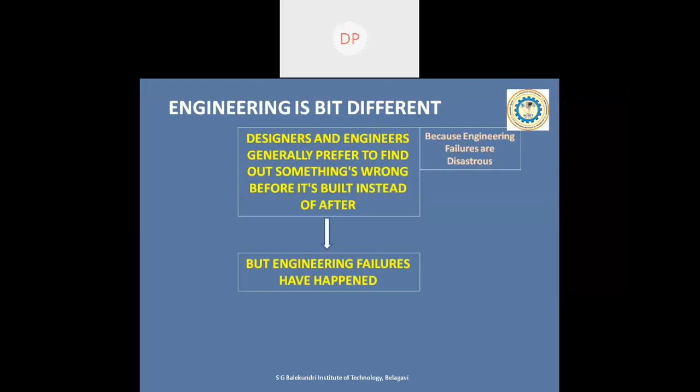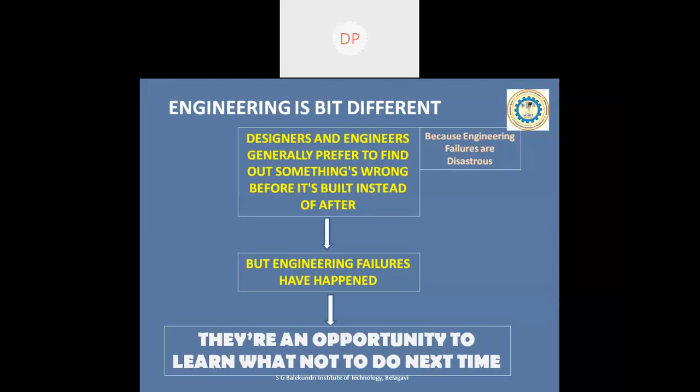But engineering failures have happened. We can't say that none of the engineering structures have ever failed, but engineering structure failures have happened. So we can call them an opportunity to learn what not to do next time. That's the very simple thing we can do. Let me take this opportunity in this session, and we'll see some of the failures of structures, and we'll see what we can learn from those things, and what we should not do next time when we go to design or build such types of structures.

Okay, so let's take this opportunity and learn from structural failures and try not to repeat the same mistakes. Rather, I would say somebody has told that every new mistake is an opportunity to learn, but repeating the same mistake, we should term it as a blunder. So everyone has a chance to make a new mistake, but the same mistake should not be repeated. That's what we have to keep in mind.

Now when I move to the next slide, which structural failures will we be looking at today? We'll be looking at the Hyatt Regency walkway failure, Tacoma Narrows bridge failure, Can Tho bridge failure, Citicorp Tower - it's actually not a failure, but an important lesson is to be learned from that. The next one is also the same thing - it didn't fail, but there's something important we can learn from that, which is the Millennium Bridge. And the last one is a very funny one, the Walkie Talkie Tower. So I have ended my session with that little funny type of failure.

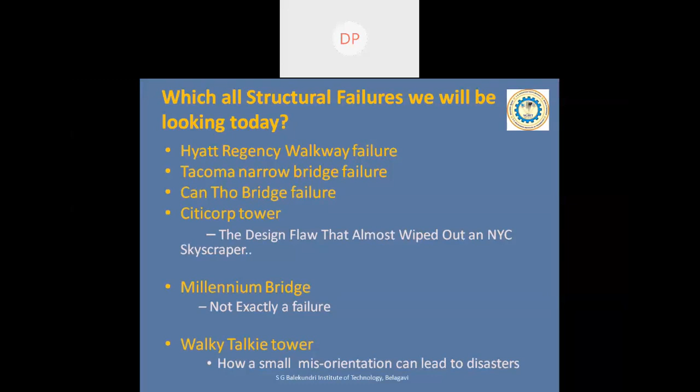So we'll see all those things one by one now. Let's start our journey. The first one, let me take the Hyatt Regency walkway failure. First, I will give the introduction about the structure, and we'll see what has actually happened there.

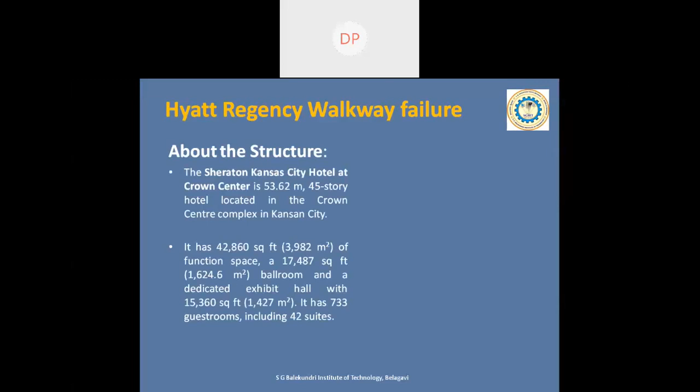So what exactly happened here? On July 17, 1981, two walkways collapsed without warning at the Hyatt Regency Hotel, one directly above the other. They crashed onto a tea dance floor being held in the hotel's lobby, killing almost around 114 people and severely injuring almost around 216 people.

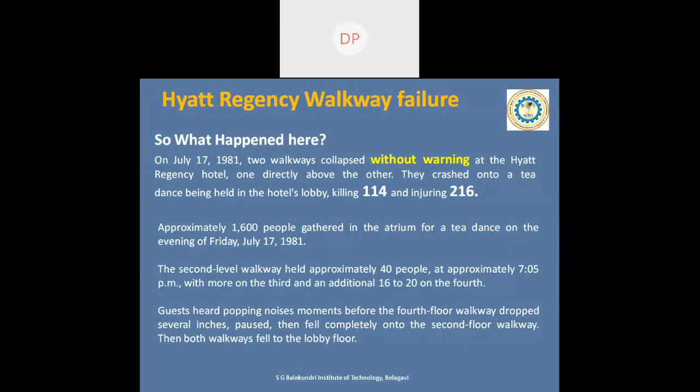Approximately 1,600 people gathered in the atrium for a tea dance on the evening of Friday, July 17, 1981. The second level walkway held approximately 40 people, with more on the third, and an additional 16 to 20 on the fourth floor walkway. Guests heard popping noises moments before the fourth floor walkway dropped several inches, paused, then fell completely onto the second floor walkway. Then both walkways fell to the lobby floor.

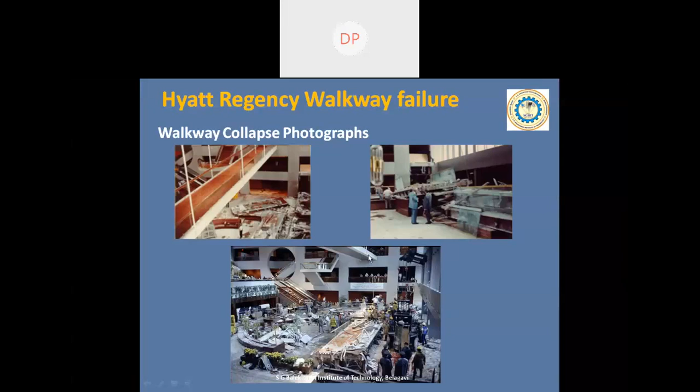These are some of the photographs showing the collapse of the walkways. You can see here the fourth floor walkway which collapsed, and the situation of the second floor walkway. This picture will give you the whole idea of what happened there. This is actually the third floor walkway, which nothing happened to.

So what was actually the cause of the collapse? Instead of being supported by pillars, each walkway was suspended from long rods hanging down from the ceiling. That's why the walkways were called skywalks, because nothing was supporting them from beneath. They were totally hanging from the ceiling.

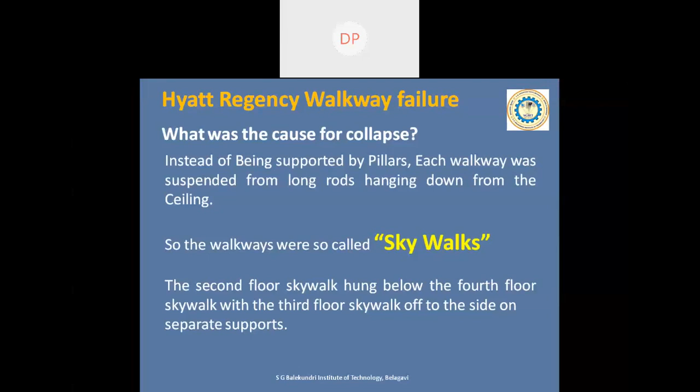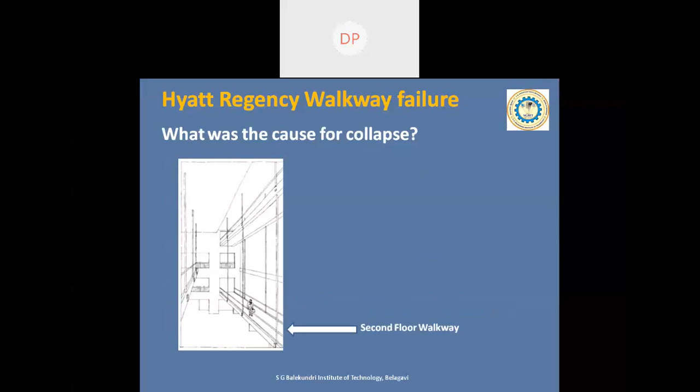The second floor skywalk hung below the fourth floor skywalk, with the third floor skywalk off to the side on separate supports. I'll show you the diagrams. So this is the second floor walkway, which was supported below the fourth floor walkway.

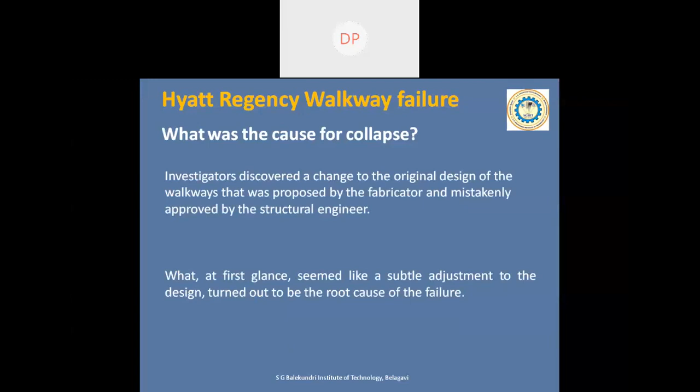And why did they actually collapse? Investigators discovered a change to the original design of the walkways that was proposed by the fabricator and mistakenly approved by the structural engineer. What at first glance seemed to be a subtle adjustment to the design turned out to be the root cause of the failure. Here you can see the box girder which was actually supporting the walkway, and these were the hanger rods which were supporting the box girders.

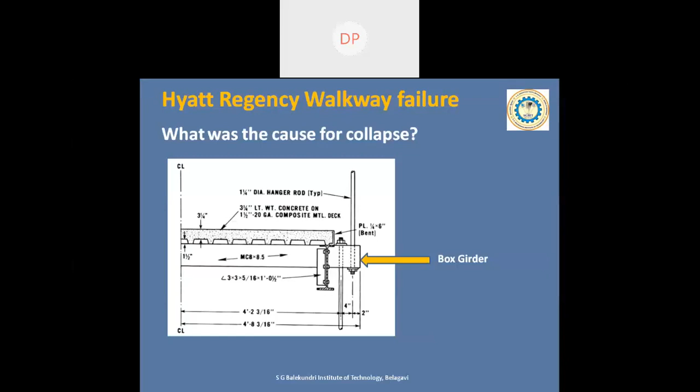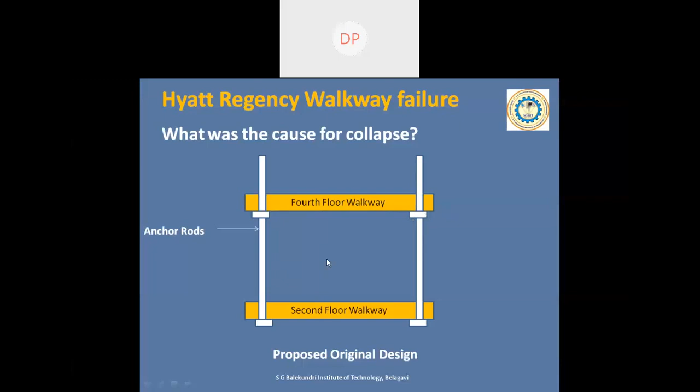Now this was actually the proposed original design, and you can see here this was the second floor walkway. I'm showing the cross section, and this was the fourth floor walkway. These were the anchor rods which were supporting both walkways. This was the original design, but it was not adopted at that point of time.

Why? The fabricator responsible for constructing the walkways objected to this plan because it would require screw threads for the entire length of the hanger rods, which could easily get damaged during construction. It was his assumption that if they provided screw threads for the whole length of the anchor rods, they may easily get damaged during construction. So this design was not feasible.

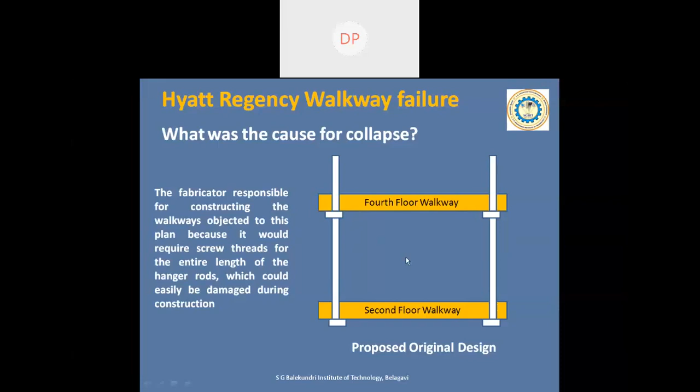So he came up with this kind of idea. This was the changed design which was actually adopted. They proposed to split the hanger rods into two sets. These hanger rods were supporting the fourth floor walkway, and these hanger rods were supporting the second floor walkway. One connected the fourth floor walkway to the roof, and one connected the second floor walkway up to the fourth floor girders.

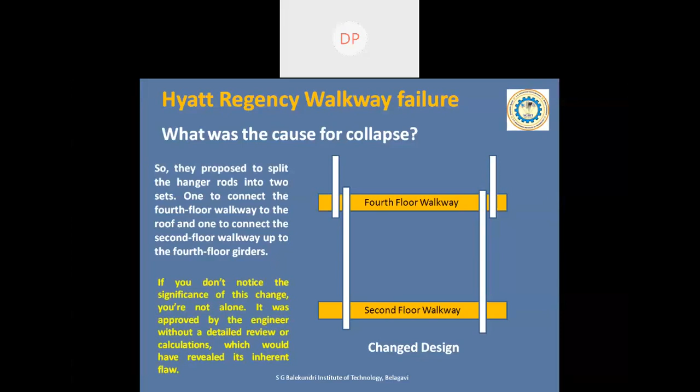Now, if you don't notice the significance of this change, don't worry, you're not alone. It was approved by the engineer without a detailed review or calculations, which would have revealed its inherent flaw, but it went unnoticed. So what was actually the mistake here? What was the mistake in the proposed design? Let me come back to the original design.

In this setup, which represents the original design, the load of the two walkways is independently transferred to the hanger rods. Now in the changed design, notice that the entire weight of the second floor walkway is being borne not directly by the hanger rod, but instead by the girder above. So the total load of the second floor walkway is now borne by the fourth floor walkway girder, and not directly by the anchor rod.

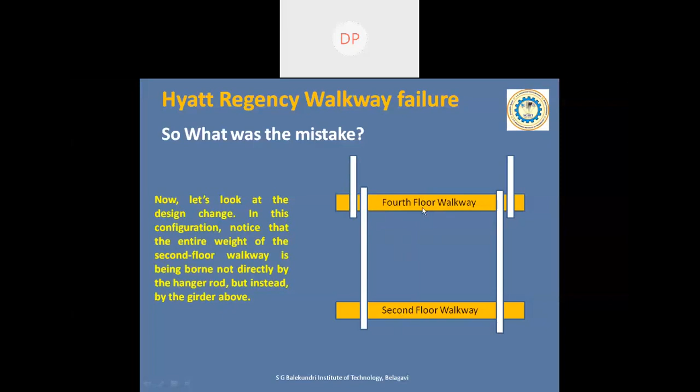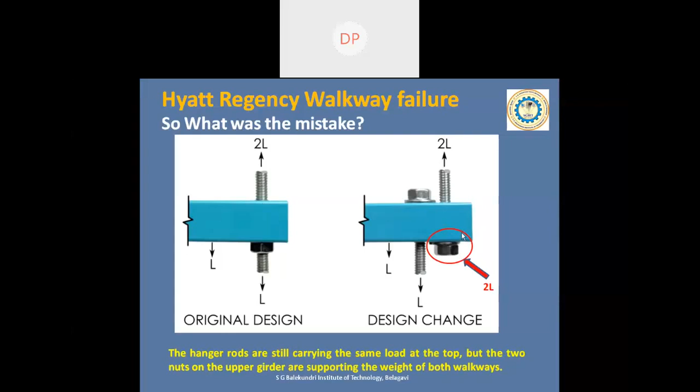Still, the anchor rods are carrying the same weight, but in this case, the load of the second floor walkway was totally borne by the fourth floor walkway. This picture will tell you the thing. This is the original design, where this fourth floor girder was carrying 2L load, and this was the load from the second floor walkway. Now in the changed design, this nut is actually not taking only L, instead it is taking 2L, meaning two times the load, which went unnoticed.

In simple words, if you are unable to understand this, imagine that you and your friend are both hanging on a rope.

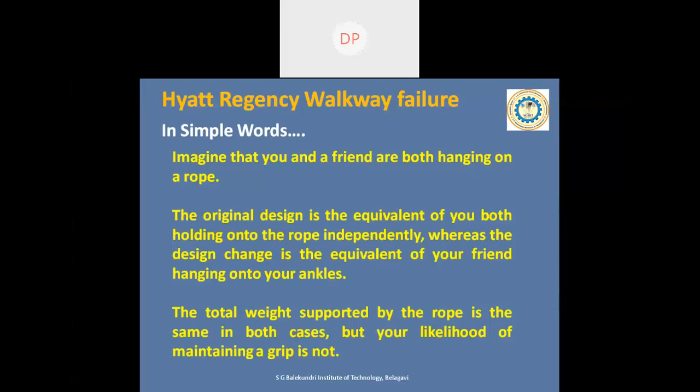The original design is the equivalent of you both holding onto the rope independently, whereas the design change is equivalent of your friend hanging onto your ankles instead of hanging onto the rope. The total weight supported by the rope is still the same in both cases, but your likelihood of maintaining grip with your friend's ankle is not. Hence, there is a high probability that you may slip from the ankles of your friend and fall down. The same thing happened in this case also.

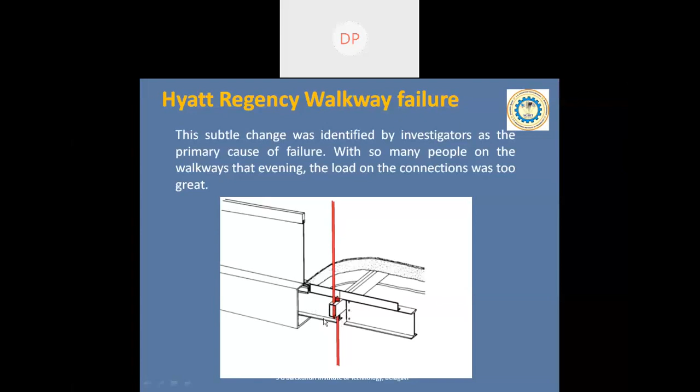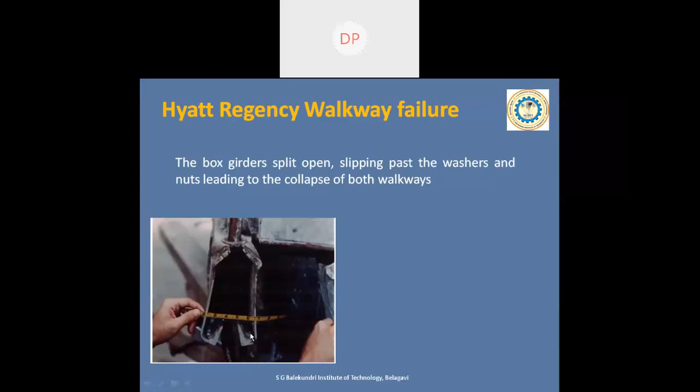This subtle change was identified by the investigators after the collapse. With so many people on the walkway that evening, the load on the connection was too great. You can see here, this was the anchor rod and these were the anchor rods - this was the connection which actually failed on that day. The box girder split open, slipping past the washers and nuts, leading to the collapse of both walkways. You can see in this diagram, the box girder has totally split open and both walkways collapsed.

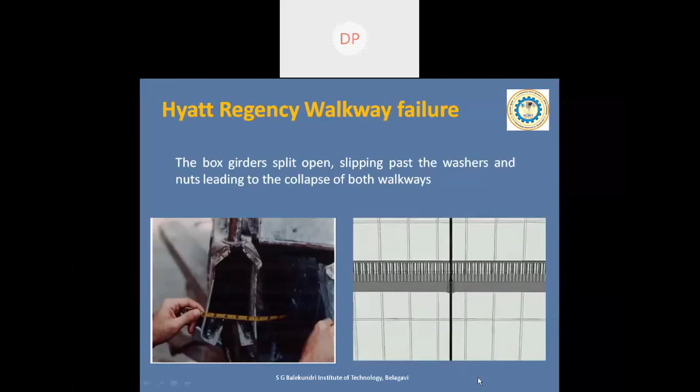This GIF file will actually slightly show you what happened exactly on that day. You can see here, because of that, the box girder is getting split open. So this caused the failure. So what lessons can we learn from this?

There is an implicit handshake between society and its engineers. We hardly have a choice but to trust that the constructed environment we live in is safe and sound. When an engineer seals a design, he or she takes responsibility for its accuracy and safety to the general public. But to err is human, and that includes engineers, because engineers are also human beings. So we try to develop conventions and processes that can catch and correct mistakes before they get too far, which actually didn't happen in this case. And that includes studying and learning from the errors made in the past.

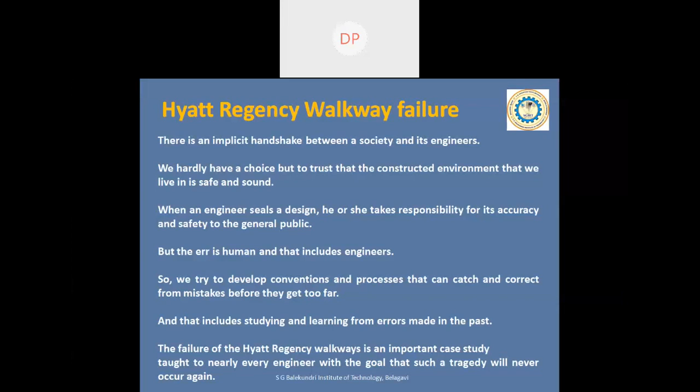That's why I chose this topic. The failure of the Hyatt Regency walkways is an important case study taught to nearly every engineer with the goal that such a tragedy will never occur again.

So we'll move on to the next type of failure. It is called the Tacoma Narrows Bridge failure. I think many of you might have learned about this type of failure, which is very much essential for any civil engineer, or I can say a structural engineer.

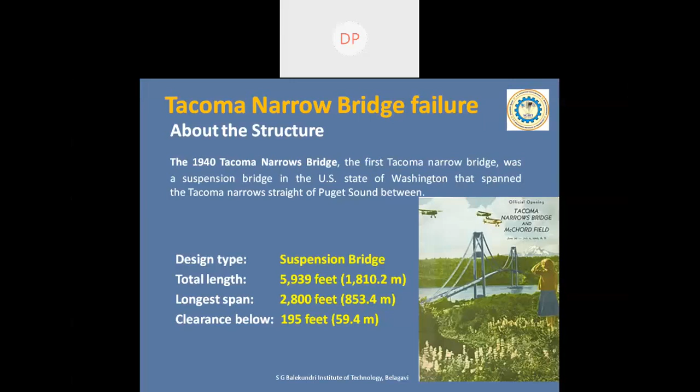So what happened here? Even before it opened in 1940, people noticed something strange about Washington State's Tacoma Narrows Bridge. It moved. Gentle winds could make the long suspension bridge flex up and down by meters at a time, making it very hard to drive or even walk across the bridge. Bridge designers tried to keep it from bouncing so much by installing shock absorbers, but they weren't effective at all. About 4 months after it opened to the public, one of its cables snapped.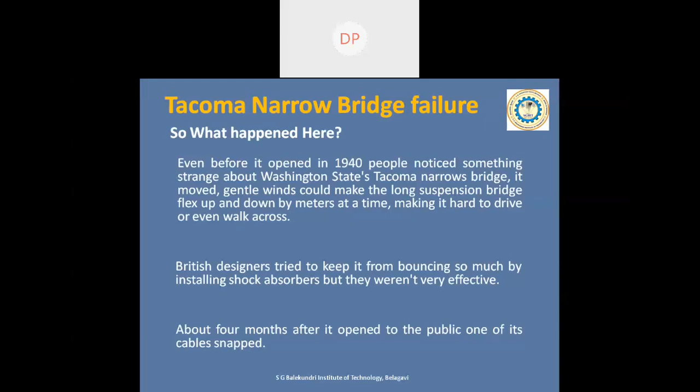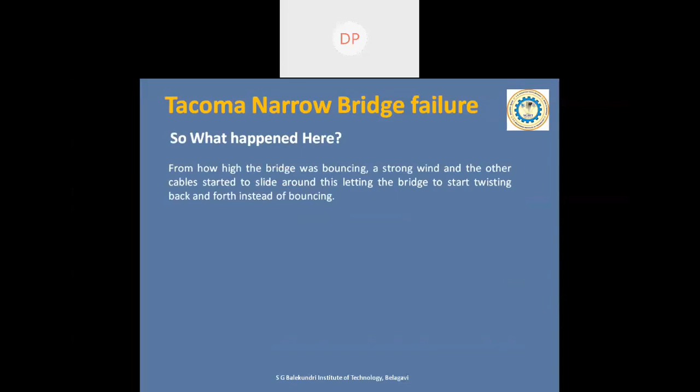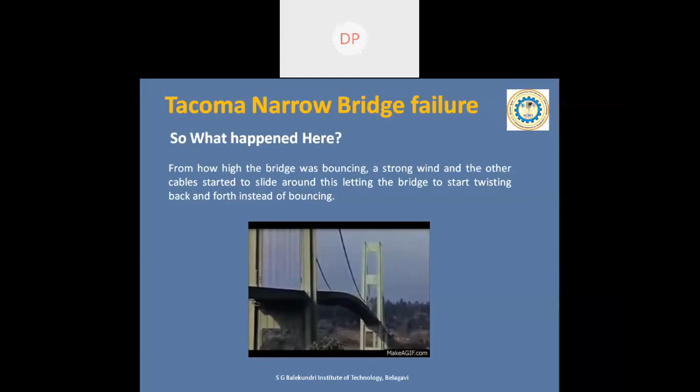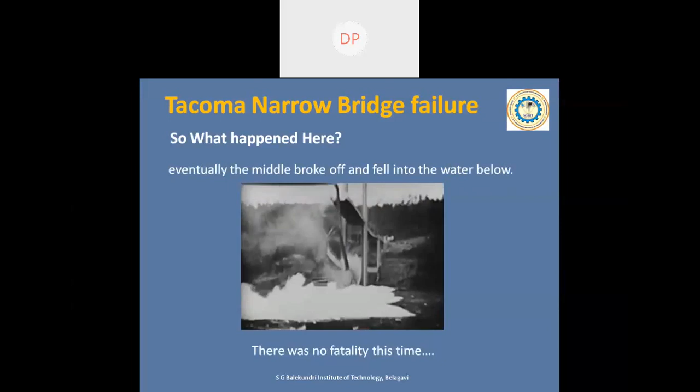From how high the bridge was bouncing, a strong wind and the other cables started to slide around, letting the bridge start twisting back and forth instead of bouncing. This GIF file will actually tell you how the bouncing and twisting effects of the narrow bridge were there. This was happening because of the wind. Eventually, the middle part of the bridge broke off and fell into the water below. Fortunately, there was no fatality at this time.

Actually, what was the cause of the failure? Tacoma Narrows failed because of something called aeroelastic flutter. The first cable snapped, and its side of the bridge fell slightly because it was less supported. Then the other cables on that side pulled up like stretched out rubber bands, and the bridge started twisting back and forth. Then the wind gave each twist a little boost. This small boost built up over the course of time and eventually twisted the bridge apart. We structural engineers call it resonance, where the natural frequency and the operating frequency both match, and the resonance effect comes into picture. The same thing happened in this Tacoma Narrows Bridge also.

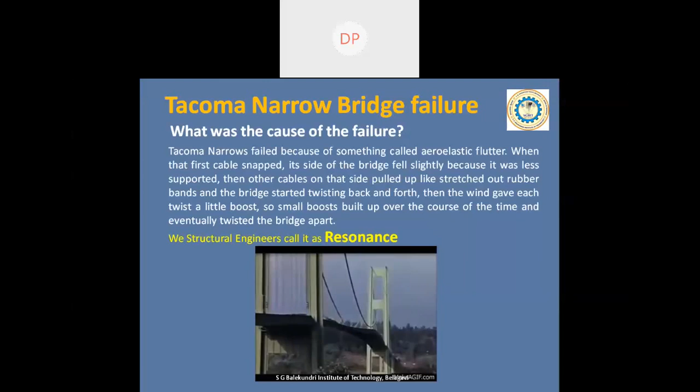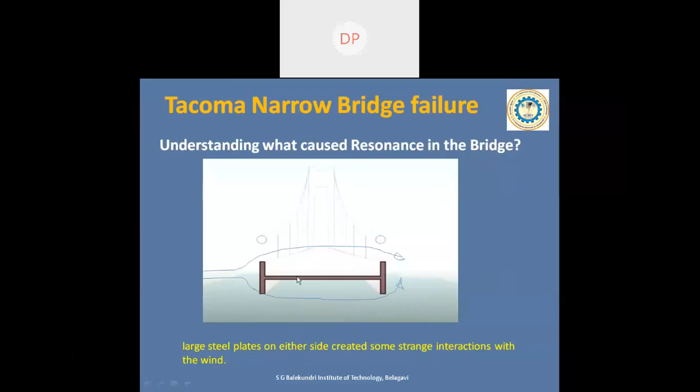Understanding what caused the resonance in the bridge, let me explain with a simple sketch. Rather than the truss through type bridge in which wind can easily flow, this type of shape of the Tacoma Narrows Bridge was actually adopted, with large steel plates on either side of the bridge. Now, what was the mistake in selecting this type of construction? The large steel plates on either side created some strange interaction with the wind whenever the wind tried to flow across the bridge. So what were those interactions?

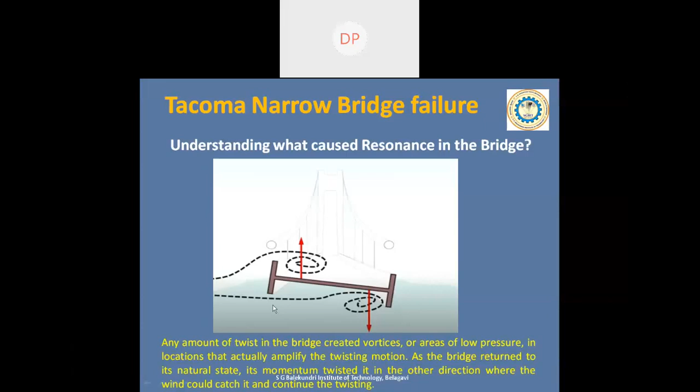Any amount of twist in the bridge created vortices. You can see these are the vortices. Vortices are areas of low pressure in locations that actually amplify the twisting motion. As the bridge returned to its natural state, its momentum twisted it in the other direction, where the wind could catch it and continue twisting. So this type of low pressure area and twisting of the bridge started twisting the bridge back and forth. And that was the main cause of the failure.

Now, what are the lessons learned here? One way that a modern bridge avoids flutter is to include a gap in the center of the deck so that the pressure on either side can equalize. Modern day bridges provide the gap in the center of the bridge so that there will not be creation of any air vortices and low pressure areas. Another option is to make the bridge deck more aerodynamic to avoid creating vortices that push and pull on the structure.

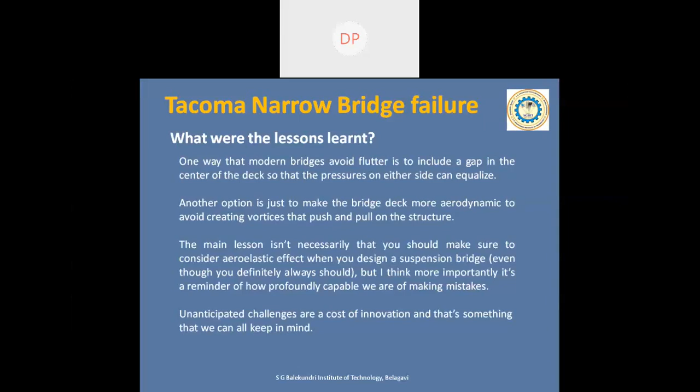The main lesson learned isn't necessarily that you should make sure to consider aeroelastic effects when you design a suspension bridge, even though you definitely always should. But I think more importantly, it's a reminder of how profoundly capable we are of making mistakes. Unanticipated challenges are the cost of innovation, and that's something that we can all keep in mind. We'll move to the next one.

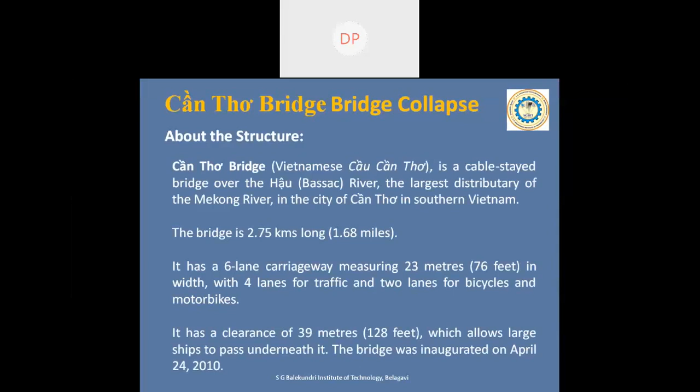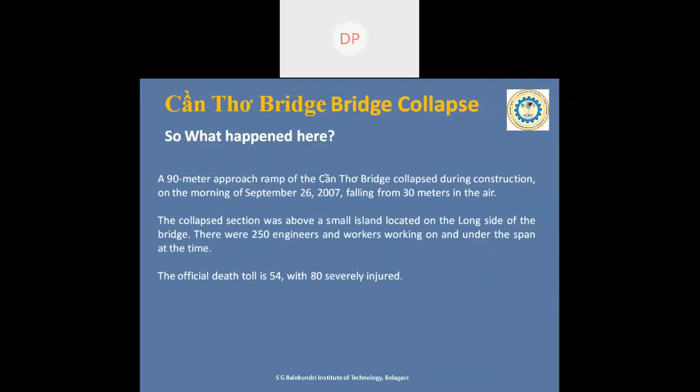So what happened here? A 90-meter approach ramp of the Can Tho Bridge collapsed during construction on the morning of September 26, 2007, falling from about 30 meters in the air. The collapsed section was above a small island. There were around 250 engineers and workers working on and under the span at that time. The official death toll was 54, with 80 severely injured people. These are some of the photographs which show the collapse of that 90-meter stretch. In this section, you can see the middle portion of the bridge has totally collapsed.

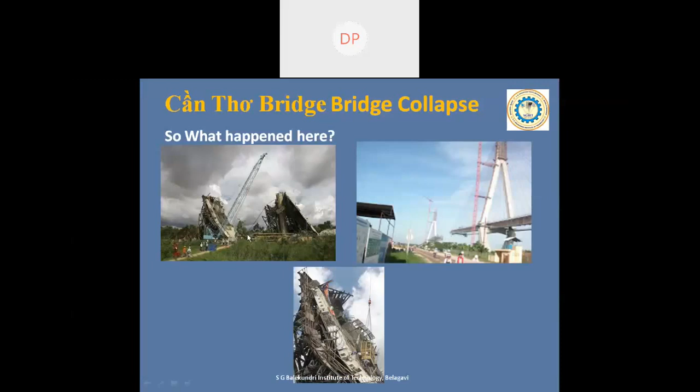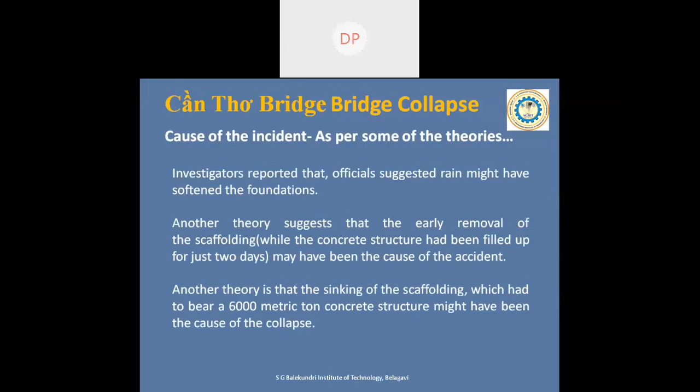So what was the cause of the incident? As per some of the theories, investigators reported that officials suggested that the rain might have softened the foundations on which the bridge was standing. Another theory suggested that the early removal of the scaffolding, while the concrete had been poured just 2 days before, may have been the cause of the accident. Another theory says that the sinking of the scaffolding, which had to bear 6,000 metric tons of concrete structure, might have been the cause of the collapse.

Before the collapse, on 12 January, a Japanese construction consultant recommended specific measures for installing temporary poles for the scaffolding. Pile testing for their loading must be carried out in accordance with international standards and codes, which he proposed. According to this consultant, the loading capacity of the scaffolding as per the detailed design proposed by the contractor just meets 15% of the required loading. He remarked that the contractor just multiplied the pile overloading ratio by 1.15 instead of 1.25, according to the American standard, or 1.35, according to the Japanese standard.

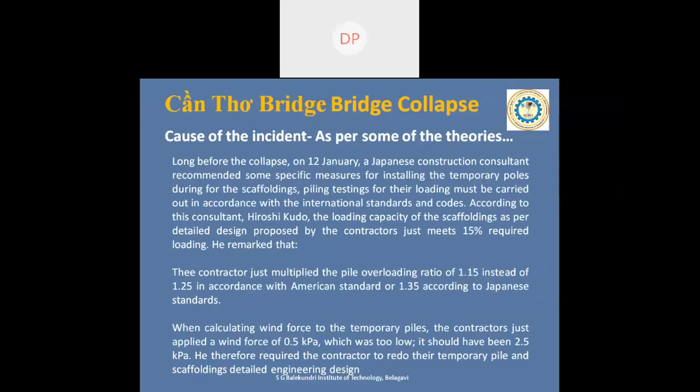When calculating wind force on the temporary piles, the contractor applied a wind force of 0.5 kilopascal, which was too low. It should have been 2.5 kilopascal as per the local topography codes. He therefore required the contractor to redo their temporary pile and scaffolding detailed engineering design, but it never happened. So that was the cause of the failure as per some of the theories. We'll move to the next one. This is the Citicorp tower.

This is actually not a failure, but a very important lesson needs to be learned from this kind of failure. This actually could have happened, and it could have totally wiped out one of the New York City skyscrapers. I'll tell you about this structure now.

It is an office tower in New York City, located at 53rd Street between Lexington and 3rd Avenues in Midtown Manhattan, built in 1977 to house the headquarters of Citibank. It is around 280 meters tall and has 59 floors with around 1.3 million square feet. It approximates around 120,000 square meters for office space.

You can pick it up from the New York City skyline by its 45-degree angle drop. You can easily distinguish this skyscraper in New York by its very distinctive 45-degree angle drop. It's the base of the building that really makes the tower so unique. The bottom 9 of its 59 stories are something called stilts, also called super columns. This thing does not look sturdy, but it has to be sturdy. Otherwise, they would have not built it this way, right?

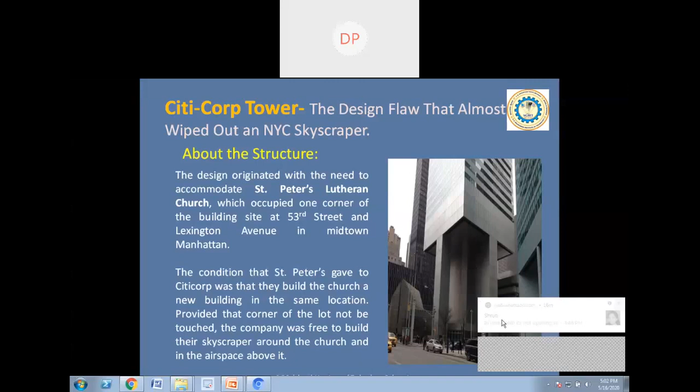Means this church was obstructing one of the corner columns of this structure, and they told that if it is to be built, they should not disturb the church. So what was going on with the structure? Placing the building on its stilts, huge super columns located at the center, not the corners, of each face of the tower. So these 9-story stilts suspended the building over the church, but rather than putting the stilts in the corners, they had to be located at the midpoint of each side to avoid the church. Having stilts in the middle of each side made the building less stable.

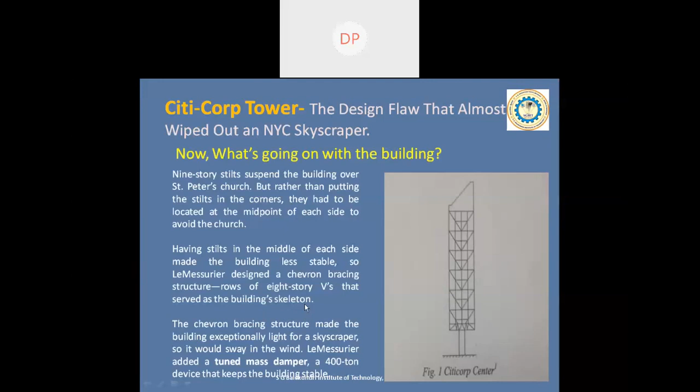So the structural engineer, LeMessurier, designed a chevron bracing structure, rows of 8-story V's that served as the building skeleton. I will show you the next picture. So this was the tower, and these were the stilts. These stilts should have been at the corner of the building, but if they had put them at the corner, they would have been on the church. So they made them come at the center. The 4 corners of the building are actually cantilevered out 115 feet above the street level.

Let's look at this picture of the Citicorp tower. We see first of all that distinctive slash-shaped top of the tower, and as we look down below, we see those super columns. Another critically important aspect of the structural system is the bracing system. The tremendous weight of this tower had to be transferred to these 4 super columns located in the middle of each face of the building. So these super columns have to take the total weight of the structure.

LeMessurier designed a unique chevron bracing. These V-type braces you see in the picture are called the chevron bracing system, forming a series of V shapes up the face of the building. The chevron bracing is designed to channel the tremendous weight of the building and all of its occupancy loads down to the center, where it is then transferred down to the super column.

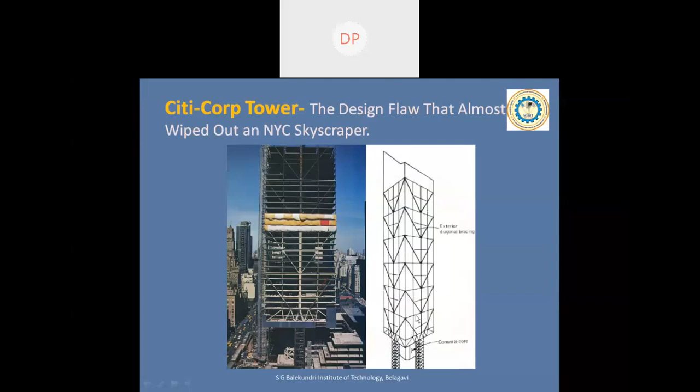Means whatever load is coming on the structure will be taken care of by these chevron bracings, and it will be channelized, and all the load will go to these super columns placed at the middle of each face of the building. It was an ingenious, cutting-edge design, and everything seemed just fine until, as LeMessurier, the structural engineer, tells it, he got a phone call.

According to LeMessurier, in 1978, an undergraduate architecture student contacted him with a bold claim about LeMessurier's building, that Citicorp Center would blow over in the wind. Okay, so now what was actually that?

After that conversation... the student, who has since been lost to history, no one knows who that was, was studying the Citicorp Center and had found that the building was particularly vulnerable to quartering winds that strike the building at its corner. Quartering winds are the winds that come to the corner of the building, at a 45-degree angle to the face of the building. Normally buildings are strongest at their corners, and it's perpendicular winds that strike the building at its faces that cause the greatest strain.

Buildings are actually strongest at the corners. That was the assumption. But this was not a normal building, right? Because the stilts were not at the corners of the building. Instead, they were in the middle of the sides of the building. Now, after talking to that student, the structural engineer decided that he would do some analysis to determine exactly how resistant to these quartering winds the structure was.

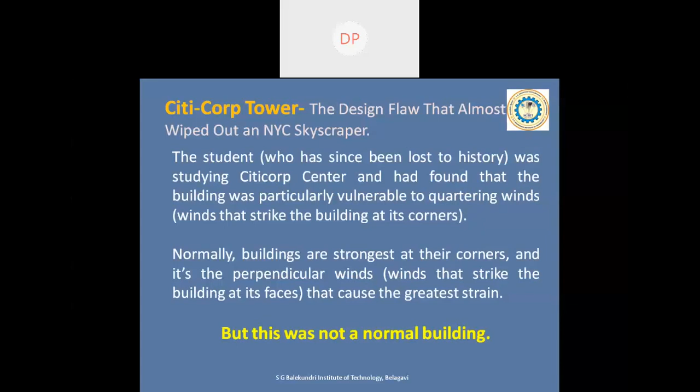So that is the LeMessurier story I told you. In other words, for every year Citicorp Center was standing, there was a 1 in 16 chance that it would collapse. So it could collapse at any time. That was the conclusion of the structural engineer after consultation with that student and after doing all those wind tunnel tests. So what did they do next?

LeMessurier and his team worked with Citicorp to coordinate emergency repairs. With the help of the New York Police Department, they worked out an evacuation plan spanning a 10-block radius, to make sure that if a collapse happened, there would be an evacuation plan. They had around 2,500 Red Cross volunteers on standby, and 3 different weather services employed 24/7 to keep an eye on potential windstorms. They worked throughout the night and quit at daybreak, just as the building occupants returned to work.

Please note, all this happened in secret. None of the occupants of the building came to know that there was strengthening or retrofitting work going on. Fortunately, Hurricane Ella, which was about to make landfall at that time, never made a landfall, so the public were never told about that.

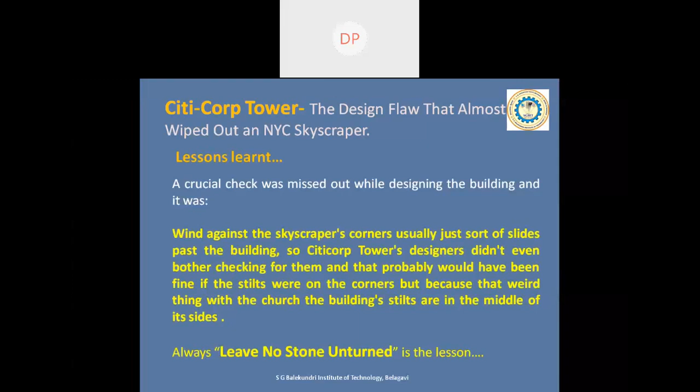So the one lesson learned is: always leave no stone unturned. That's the lesson. It means you should not bias anything. You should not leave anything out. You should check each and everything.

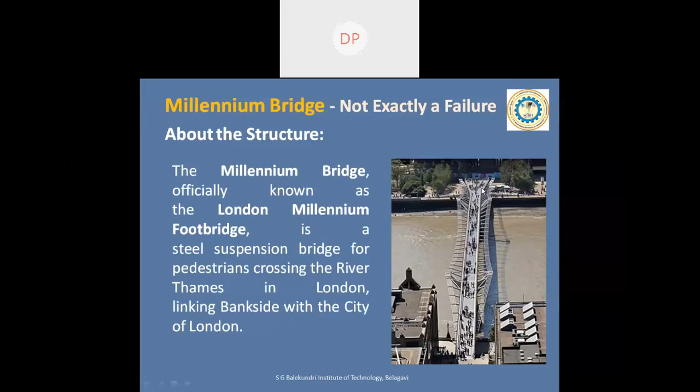So the next one, this is the Millennium Bridge. Not exactly a failure about the structure. The Millennium Bridge, officially known as the London Millennium Footbridge, is a steel suspension bridge for pedestrians crossing the River Thames in London, linking Bankside with the City of London. This picture will give you the Millennium Bridge of London.

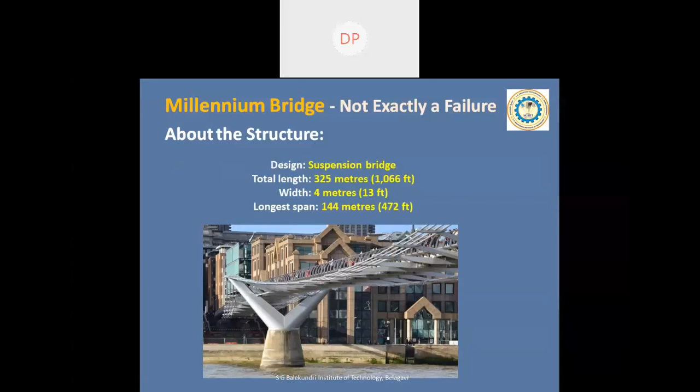So what was the design type? It was a suspension bridge. Total length of the bridge was almost around 325 meters. Width was just 4 meters because it was a pedestrian bridge. Longest span was almost around 144 meters.

On June 10th, 2000, as a way for pedestrians to cross the River Thames, it was touted as an engineering accomplishment at the time—a sleek new bridge to mark London's entry into the 21st century. Then it promptly closed for repairs on June 12th, 2000. It was opened for a grand total of 3 days. Yes, people, you heard me right—it was open for only 3 days.

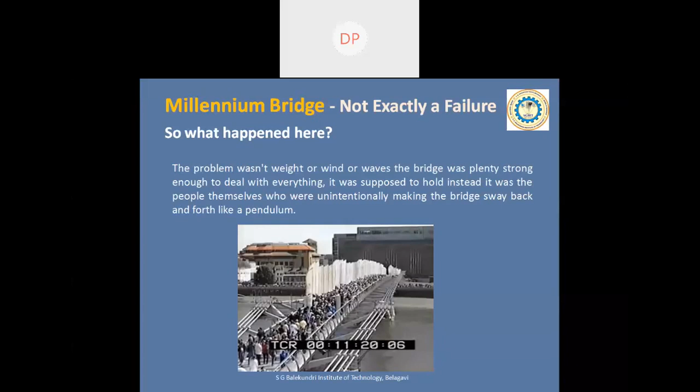So what actually happened? The problem wasn't weight or the wind or waves. The bridge was plenty strong enough to deal with everything it was supposed to hold. Instead, it was the people themselves who were unintentionally making the bridge sway back and forth like a pendulum. You can see in this GIF file, when people are trying to move on the bridge, it tries to move back and forth as if it's like a pendulum.

Some sort of random coincidence would get a wobble—we call this back and forth movement a wobble also. It started like a bunch of people randomly stepping on the bridge on the same side at the same time, with up to 2000 people crossing at once. That sort of coincidence wouldn't happen at times.

So many people walking in synchronization made the wobble get even bigger, and soon it got so extreme that people couldn't walk across the bridge without grabbing the side railings. You can see people are literally afraid to move or cross over the bridge without grabbing the side rails. The bridge probably wasn't in danger of failing because the people would stop walking once the wobbles got too big and wait for them to die down before continuing.

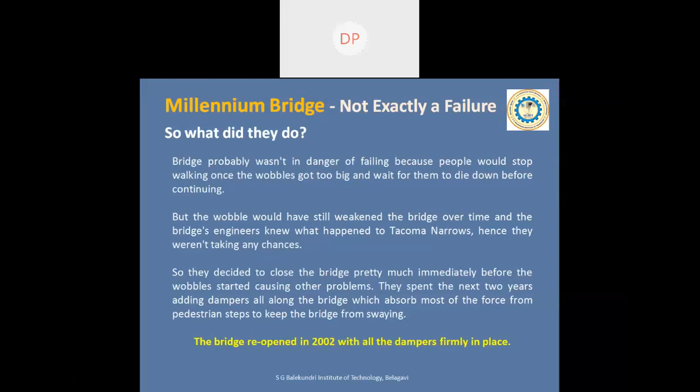People would stop when the wobble got too much, the wobble would halt, and people could once again start moving. But the wobble would have still weakened the bridge over time, and the bridge engineer knew exactly what happened in the Tacoma Narrows bridge, which we just saw. Hence, they weren't taking any chances. So they decided to close the bridge pretty much immediately after 3 days of opening, before the wobbles started causing other problems. They spent almost the next 2 years adding dampers all along the bridge, which absorb most of the force from pedestrians' steps to keep the bridge from swaying. The bridge was reopened in 2002 with all the dampers firmly in place.

So we'll see the next one. That is the last one. This is a very funny kind of failure. This is called the Walkie-Talkie Tower.

I will show you why it has been nicknamed that, because of its distinctive shape. It is a 38-story building, almost 160 meters tall, designed by architect Rafael, costing almost over 200 million pounds. The entrance floor and 34 floors of office space are topped by a large viewing deck. Bars and restaurants are included on the 35th, 36th, and 37th floors.

What was that criticism? During the building's construction, it was discovered that for a period of about 2 hours each day, if the sun shines directly on the building, it acts as a concave mirror and focuses light on the streets to the south. Spot temperature readings at street level, including up to 91 and 117 degrees Celsius, were observed during summer 2013. Please note, the temperatures recorded were 91 to 117 degrees Celsius.

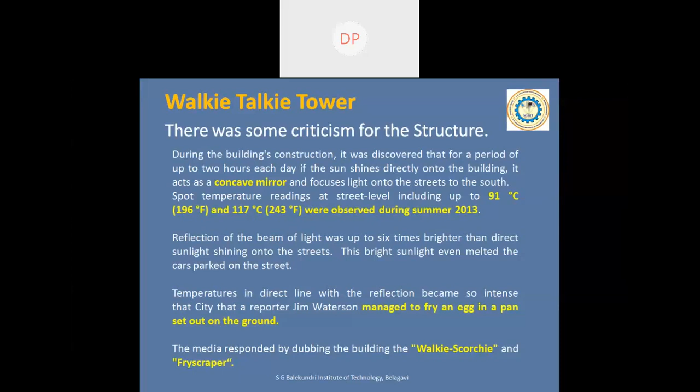The media responded by dubbing the building the Walkie Scorchie or Fryscraper. You can imagine. You can see this diagram will actually tell you what was actually happening.

These were the sun rays hitting the concave shape of the building, which was given by the architect. The skyscraper's shape means that a large amount of sunlight is reflected to a small area. When the sun rays hit this concave shape, they were diverted onto this south street, onto a small area, because of the concave effect.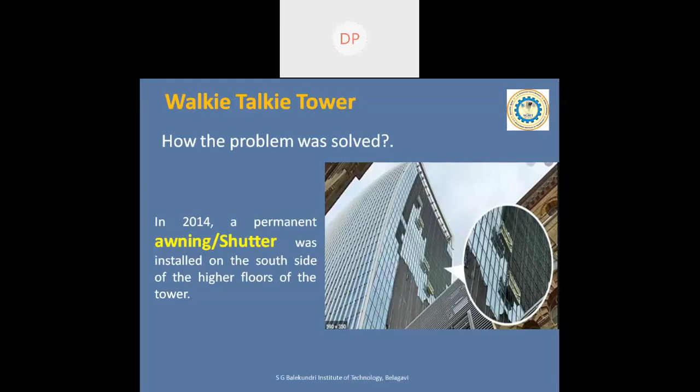So now these are all the structures I have taken for my PPT. There are many other structures which you can go through, and you can learn some lessons from all of them. I'm almost at the end of my session, and my next slides are pretty interesting, making everyone scratch their heads and think about what you should actually do.

Finally, as an engineer, or as a civil engineer, there are actually 3 choices with you: either you go with cheap, fast, or quality. You have to pick any 2 of them. Which 2 will you pick? You can think for a second and see what will happen. Let me tell you the consequences.

The consequences are: if you go for cheap and fast, you should compromise on quality. If you go with fast and quality, it is not so cheap. If you go with cheap and quality, it is not so fast. So which 2 will you pick?

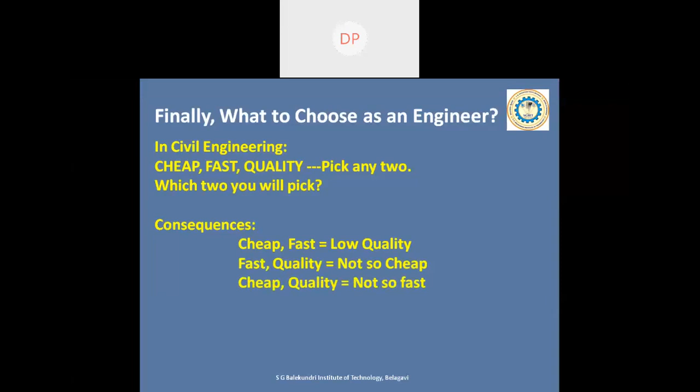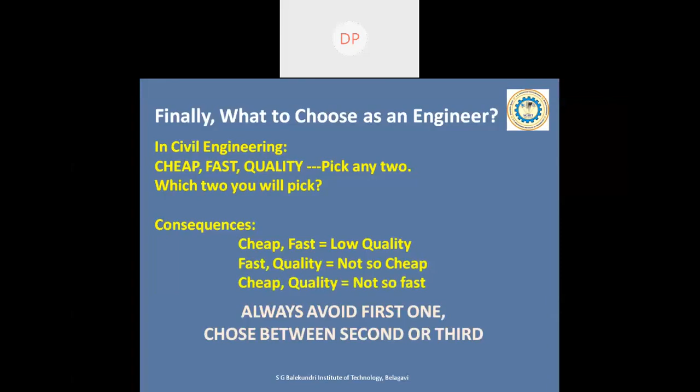As per my suggestion, always avoid the first one, where you compromise on quality. Choose between the second or third. If you want the second choice, fast and quality, it will not be so cheap. If you have an abundant amount of money, you can go with the second one. If you have a lot of time, you can go with the third one, but it will not be so fast. Similarly, in structural engineering

also, we have 3 terms: light, strong, and cheap.

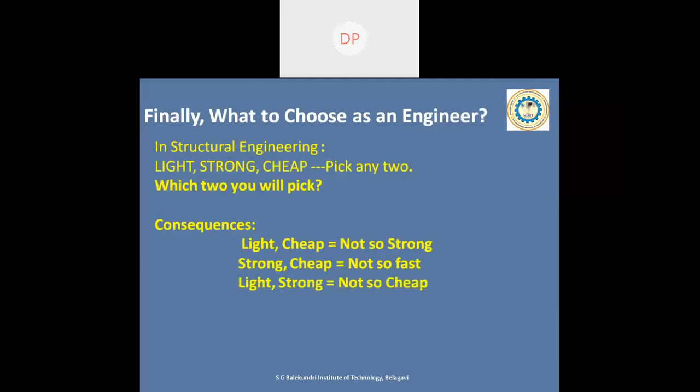Which 2 you will pick? Let me tell you the consequences. Light and cheap, it will not be so strong. If you want strong and cheap, it will not be so fast. If you want light and strong, it will not be so cheap. My suggestion: always avoid the first one, which will not be strong. Go with the second or third one based on your situation.

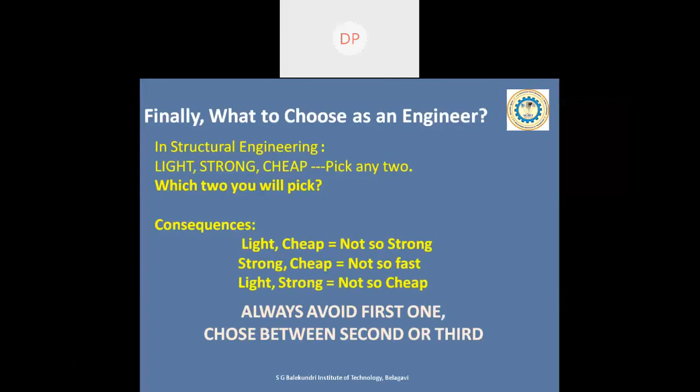So finally, thank you. Learn from the mistakes of others, because you can't live long enough to make them all by yourself. Thank you, everyone. I will share this PPT with everyone who submits the feedback form, to all your email IDs. I will try to share all the PPTs.